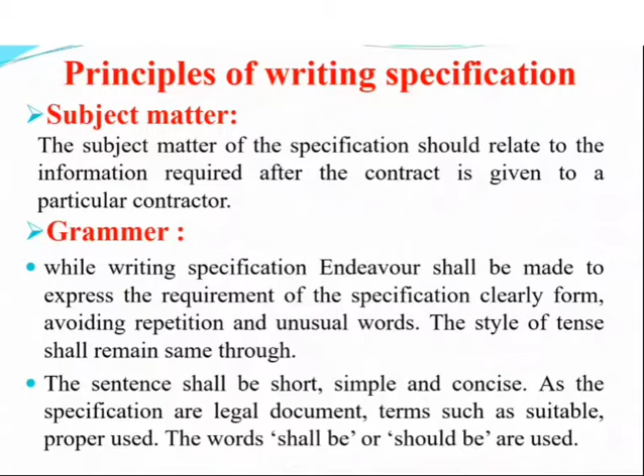Next, third is meaning. While drawing specification, only suitable words with desired meaning should be used. So words having more than one meaning shall be avoided.

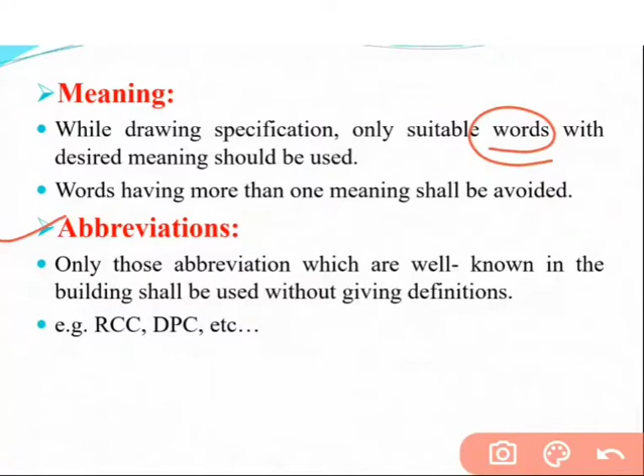Next, fourth is abbreviation. So only those abbreviations which are well known in the building industry shall be used without giving definition. The use of abbreviation facilitates easy understanding and reduces typing work without sacrificing clarity. For example, RCC, DPC, etc.

Now next is accuracy. Meaning the information given in the specification should be complete and correct. Otherwise, the contractor may claim for any extra cost due to damage occurred to him by the misleading information supplied by the owner. Also, care should be taken to see that information is not repeated in the specification.

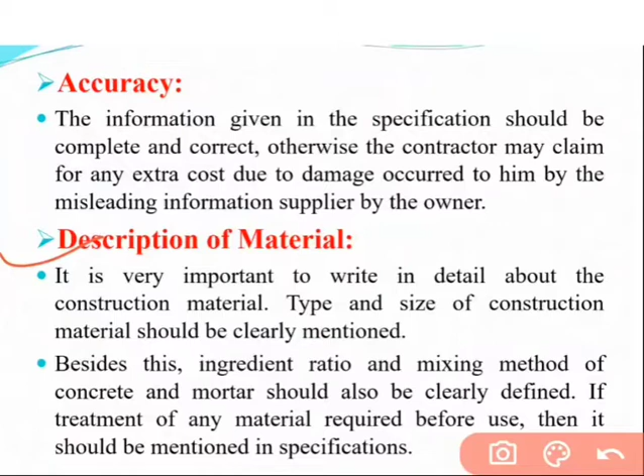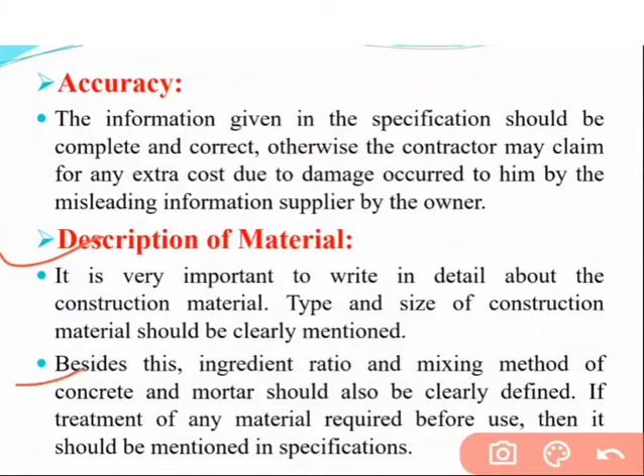Now next is description of material. It is very important to write in detail about the construction material. The quality and size of material required to do an item of work shall be fully described for checking up at site according to the clauses provided in the specification. And second, the proportion of mixing or treatment of materials, if required before use, shall be clearly described.

Now next is workmanship. Workmanship covers the method of mixing and proportion, the method of laying, preparation of base or surface, compaction, finishing and curing, etc. Procedure of every single item should be mentioned in detail.

Next is tools and plants. The different equipment, tools and plants required during construction should be clearly mentioned in specification. Arrangement of machinery before construction is only possible if it is mentioned in specification. The tools and plant to be engaged to carry out work shall be described. It should also be mentioned whether the contractor has to arrange on its own or the client will arrange equipment for the contractor.

Now next is clauses of a specification. Clauses of a specification should be written in ascending order in short follow the construction schedule. First thing comes first. As far as possible, the clauses shall be arranged in the order in which work shall be carried out. This doesn't mean to follow the works according to the order of clauses, but it facilitates references. For example, clauses related to excavation should come before foundation or footing related clauses.

Now next is practicability. That means the specification should be framed while keeping in view the practical limitation of materials and workmanship. Also, the specification should specify use of commercial size and pattern of material, since it becomes expensive to manufacture special sizes, and it also takes more time to prepare such sizes.

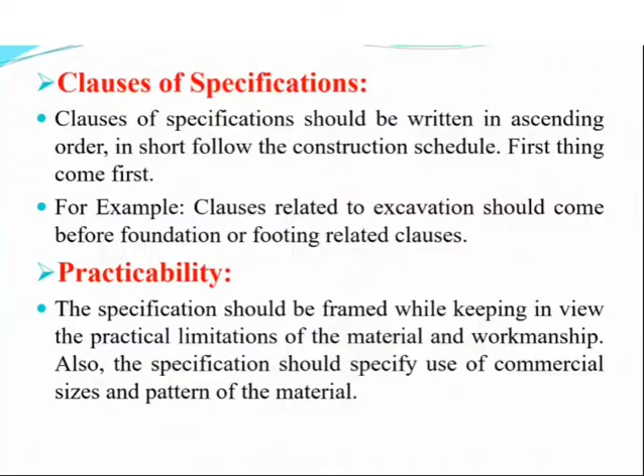Now next we are going to discuss detailed specification of various items. First is earthwork in excavation in foundation. First step is excavation. Before the earthwork is started, the whole area of construction is to be cleared of trees, grass, roots of trees, etc., completely removed and leveled horizontally to enable easy marking of center line of the building. The sides of trenches should be vertical and the bottom of the trenches should be leveled.

The excavation shall be done in accordance with the dimensions of trenches shown in working drawing, or such other as the engineer in charge may decide.

If the soil is not good and doesn't permit vertical sides, the sides should be sloped back or protected with timber shoring. The sides of trenches should be vertical and the bottom of trenches should be flat. In case of loose soil, the sides of trenches should be shored with steel sheet.

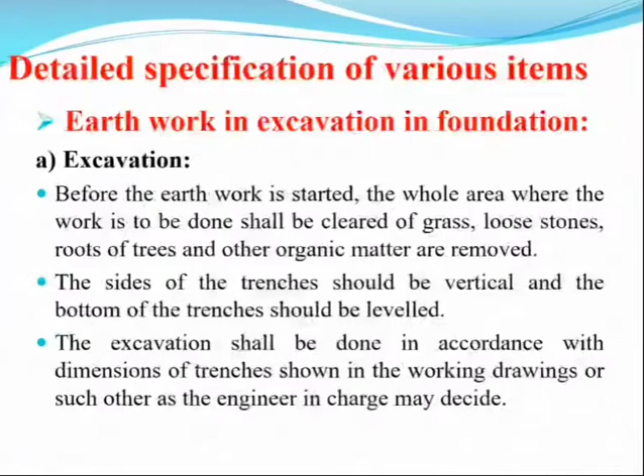Now the second step is fencing. Suitable temporary fencing is to be provided around the site of excavation to avoid any accidental fall into the trenches.

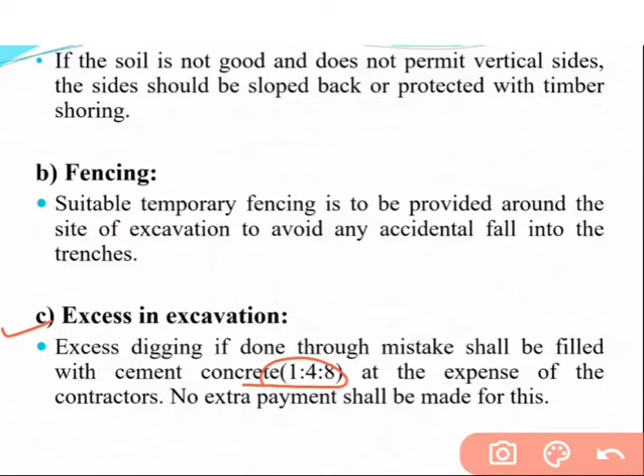Now the third step is excess excavation in foundation. Digging, if done through mistake, shall be filled with cement concrete 1:4:8 proportion at the expense of the contractor. So no extra payments shall be made for this.

Now the next step is water in foundation. If any accumulates in the trench, it should be pumped out, and no extra amount shall be paid. Necessary precaution shall be taken to prevent surface water from entering into the trench.

Now next, finds. The material or valuables found during excavation shall be the property of the government or owner.

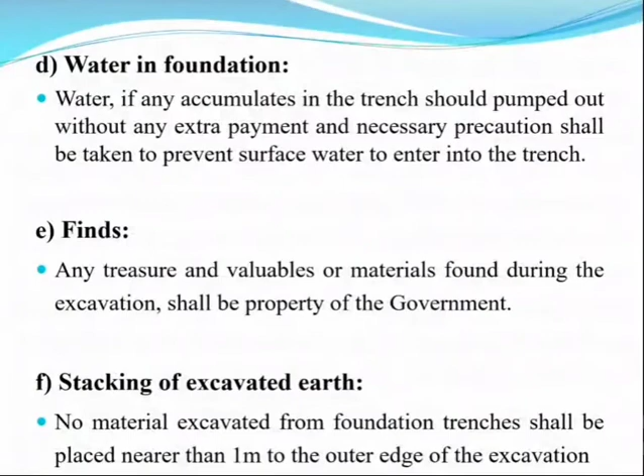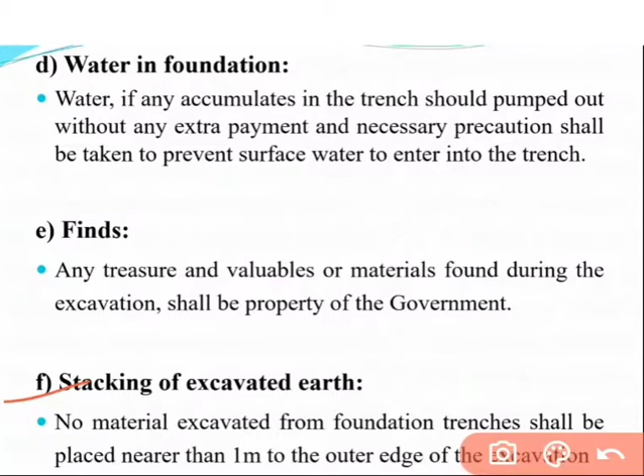Now next step is stacking of excavated earth. No material excavated from foundation trenches shall be placed nearer than 1 meter to the outer edge of the excavation.

After the concrete has been laid and masonry has been constructed, the remaining portion of the trench shall be filled up with earth free from rubbish and refuse materials in layers of 15 centimeters, watered and well rammed. The surplus excavated material shall be spread out uniformly up to a lead of 30 meters.

Next step is measurement and rate, and this is the last step of excavation in foundation. The measurement shall be taken in cubic meters, measuring length, width of concrete and depth of foundation from ground level, and the rate shall be for complete work for 30 meter lead and 1.5 meter lift, including all tools and plant required for completion of the work. For every extra lead of 30 meters and every extra lift of 1.5 meters, a separate extra rate is provided.

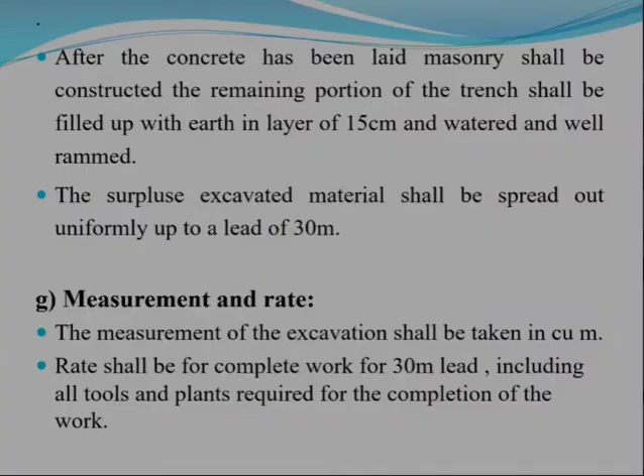Now next, detailed specification for cement concrete in foundation in 1:4:8 proportion. First step is proportion mixing. The proportion of materials shall be 1:4:8, where 1 part cement, 4 parts sand, and 8 parts aggregate by volume.

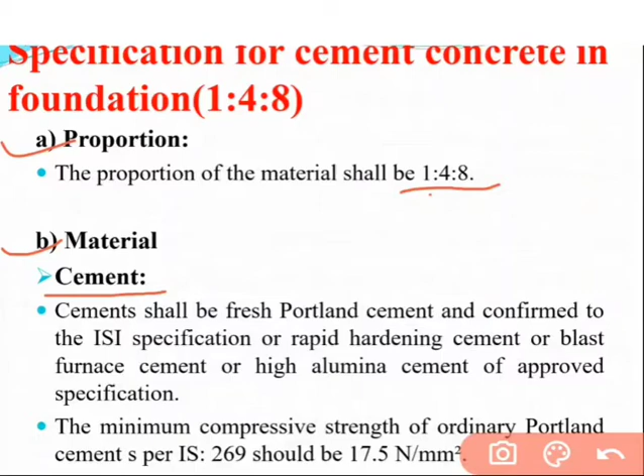Now second step is material. First material used is cement. Cement shall be fresh Portland cement conforming to ISI specification, or rapid hardening cement, or blast furnace cement, or high alumina cement of approved specification. The minimum compressive strength of ordinary Portland cement as per IS 269 should be 17.5 Newton per mm square.

Now second material used is fine aggregate. The fine aggregate shall conform to IS 383 up to date. It shall be clean, sharp, hard and angular grain and shall pass through 4.75 mm IS sieve. It should be free from dust, dirt, vegetable and organic matters. Sea sand shall not be used, so river or pit sand shall be used.

Now next material used is coarse aggregate. The coarse aggregate shall be hard broken stone or granite or similar stone. It shall be hard, strong, durable and dense. It should be free from soft, thin, flat, elongated, flaky particles. It should be clean and free from dust, vegetable and organic matter unless specially mentioned. The size of coarse aggregate shall be 20 to 40 graded down and retained in 5mm sieve.

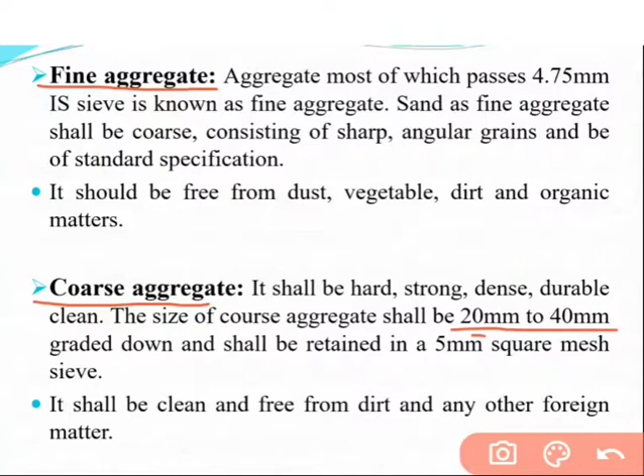Now next material is water. The water used shall be clean and reasonably free from injurious quantities of deleterious materials such as oil, acid, alkalis, salt and vegetable growth. Generally, potable water shall be used.

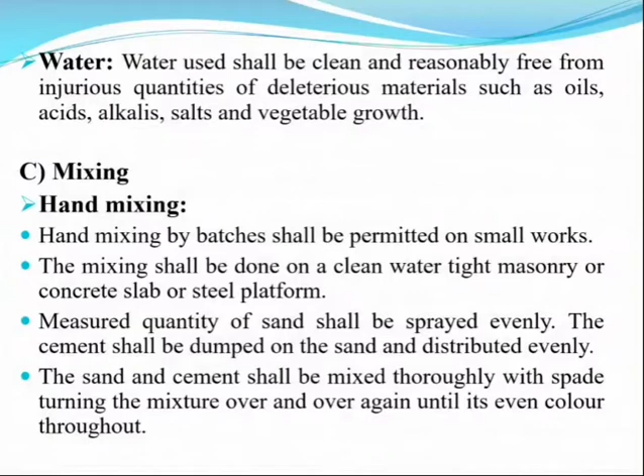Now third step is mixing. Mixing is basically of two types: first, hand mixing, and second, machine mixing. Hand mixing by batches shall be permitted on small works. Normally, all structural concrete shall be mixed in a mixer machine. Hand mixing shall be employed only in special cases with the specific prior permission of the engineer in charge.

The mixing shall be done on a clean watertight masonry platform, concrete slab, or steel platform. The measured quantity of sand shall be spread evenly on the platform. The cement shall be dumped on the sand and distributed evenly. The sand and cement shall be mixed thoroughly with a spade, turning the mixture over and over again until it is of even color throughout.

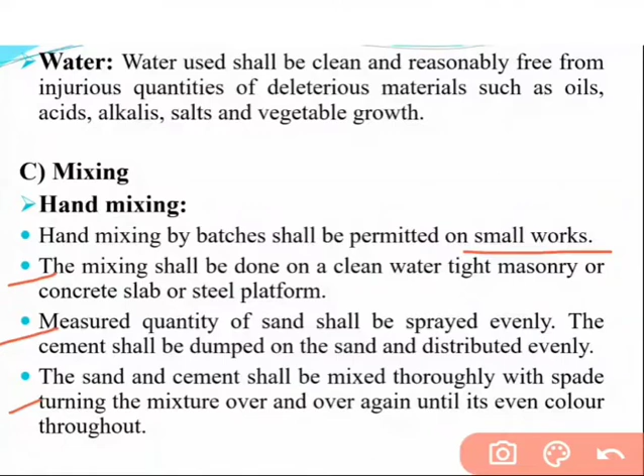Then the measured quantity of coarse aggregate shall be spread out and cement sand mixture shall be spread on its top. This shall be mixed at least 3 times by shovelling and turning over by twist from center to side.

Then 3/4 of the total quantity of water required shall be added while the material is turned in towards the center with spades.

Then the remaining quantity of water shall be added bit by bit using a rose head can, slowly turning the whole mixture over and over again until a uniform color and consistency is obtained throughout the pile.

And lastly, the measured quantity of coarse aggregate shall be spread out and the sand cement mixture shall be spread on its top. The mixing platform shall be washed at the end of the day.

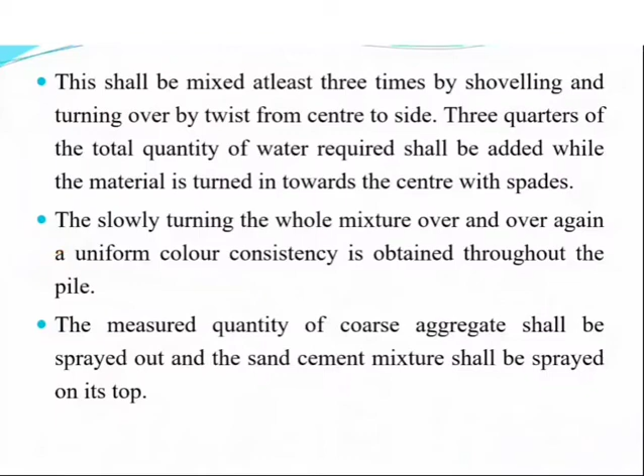Now second is machine mixing. The mixture drum shall be flushed clean with water.

Measured quantity of dry coarse aggregate shall be placed first in the drum. Then the measured quantity of sand and cement is added. Then the dry material shall be mixed in the mixing drum for at least 4 turns of the drum.

After which the measured quantity of water shall be added gradually and slowly with a water can while the drum is in motion, to give a plastic mix of required workability. The material shall be mixed in the drum for a period of not less than 2 minutes and until a uniform color and consistency are obtained.

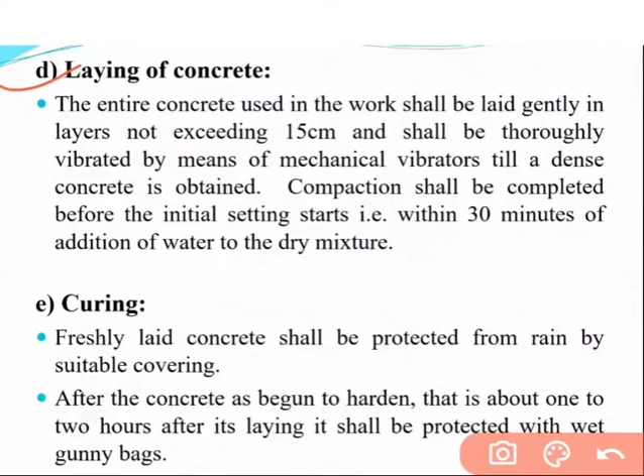Now the next step is laying of concrete. Concrete shall be laid in layers not exceeding 15 centimeters and compacted by pinning with a rod and tamping with a wooden tamper or with a mechanical vibrator until a dense concrete is obtained.

Then the compaction shall be completed before the initial setting starts, within 30 minutes of addition of water to the dry mixture. Over vibration, which will separate coarse aggregate from concrete, should be avoided. Now the next step is curing.

Freshly laid concrete shall be protected from rain by suitable covering. Then after the concrete has begun to harden, that is about 1 to 2 hours after its laying, it shall be covered with wet gunny bags.

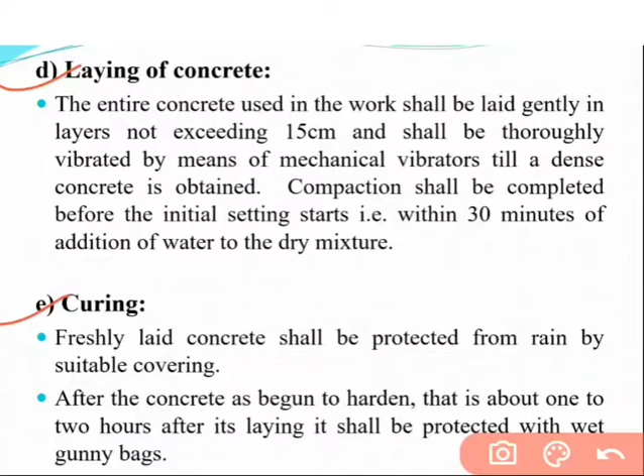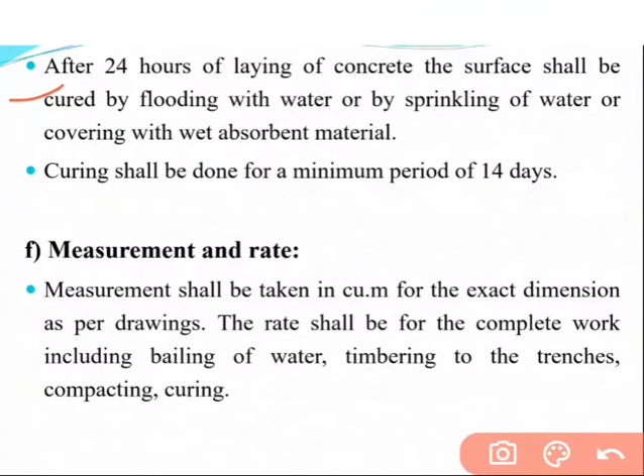After 24 hours of laying of concrete, the surface shall be cured by flooding with water, or by sprinkling water, or covering with wet absorbent material. Then the curing shall be done for a minimum period of 14 days.

Now the last step is measurement and rate. The measurement shall be taken in cubic meters for the exact dimension as per the drawing, and the rate shall be for the complete work including bailing of water, compaction, curing, timbering to the trenches, etc.

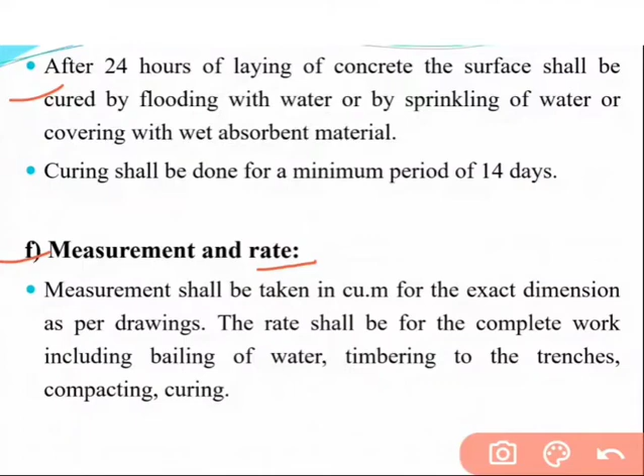Now next, let's discuss in detail the specification for reinforced cement concrete. First step is proportion. The proportion of the material shall be 1:1.5:3, where 1 part cement, 1.5 part sand and 3 part aggregate by volume.

Second step is material. First is cement. The cement shall be fresh Portland cement conforming to ISI specification, or high alumina cement or blast furnace cement or rapid hardening cement of approved specification shall be used.

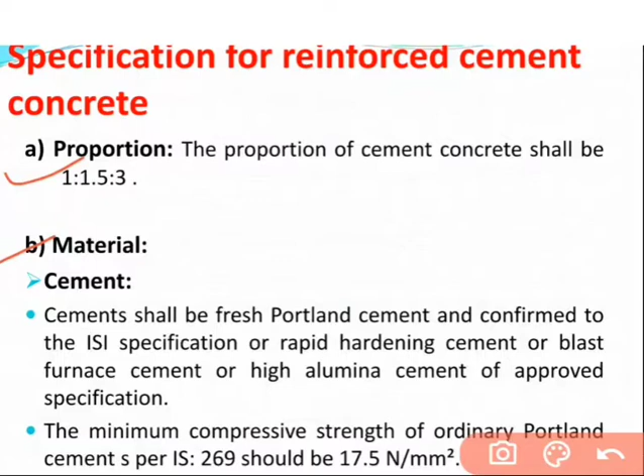Now next material is fine aggregate. The fine aggregate shall conform to IS 383 up to date. It shall be clean, hard and angular grained, and shall pass through 4.75 mm IS sieve, known as fine aggregate. It should be free from dust, vegetable and organic matter.

Now next material is coarse aggregate. The coarse aggregate shall be hard broken stone of granite or similar stone. It shall be hard, strong, durable and dense. It should be free from soft, thin, flat, elongated, flaky particles. The size of coarse aggregate shall be 20 mm graded down and shall be retained on a 5 mm square mesh sieve.

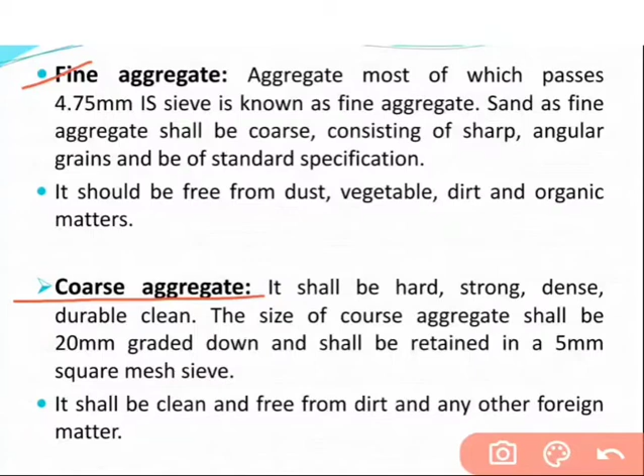Now next material is water. The water used shall be clean and reasonably free from injurious quantities of deleterious materials such as oil, acid, alkalis, salt, and vegetable growth. Generally, potable water shall be used.

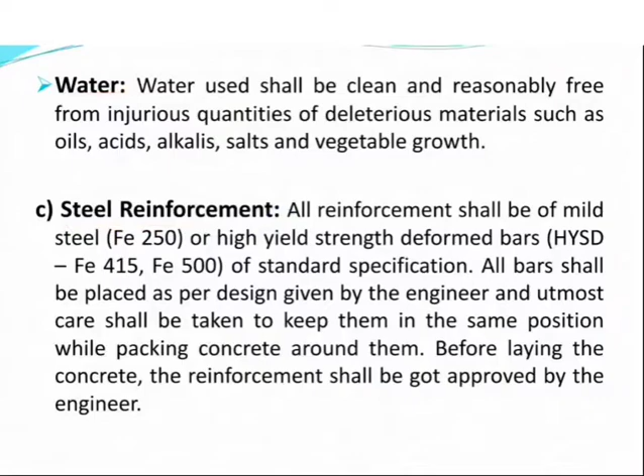Now next is steel reinforcement. Steel reinforcing bars shall be of mild steel or Fe250, or high yield strength deformed bar HYSD, Fe415, Fe500, of standard specification. It shall be free from corrosion, loose rust, oil, grease, paint, etc., which may destroy or reduce bond.

The steel bars shall be round and capable of being bent without fracture, and bars shall be hooked and bent accurately and placed in position as per design and drawing given by the engineer, and utmost care shall be taken to keep them in the same position while packing concrete around them.

Before laying the concrete, the reinforcements shall be got approved by the engineer. During laying and compacting of concrete, the reinforcing bars should not move from their position, and the bond should not be weakened.

Now next is centering and shuttering. The centering and shuttering shall be made of timber and tied with necessary wedges, sufficiently strong and stable not to yield under laying of concrete. The centering for the concrete work shall be sufficiently strong and rigid and in good condition so as to turn out a good smooth finish.

Also, the material for formwork shall be of timber or steel plate or plywood sheet or any other material approved by the engineer in charge.

A coat of oil washing or thin layer of paper shall be sprayed to have a smooth finished surface and to prevent adherence of concrete. For slab and beam, a camber should be given in centering at 1 cm per 2.5 meter, with a maximum of 4 cm.

Then the surface of the formwork shall be oiled before placing of concrete. Also, the centering and shuttering shall not be removed before 14 days in general. So 4 days for RCC column, 10 days for roof slab, and 14 days for beam. The centering and shuttering shall be removed slowly and carefully so that no part is disturbed or damaged.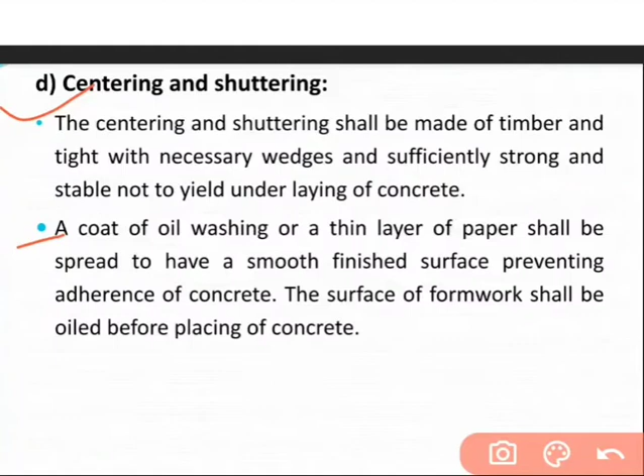Now next is mixing. The mixing process is already discussed in a similar topic of detailed specification for cement concrete in foundation. So first is hand mixing and second is machine mixing. Hand mixing by batches shall be permitted for small work. The mixing shall be done on a clean watertight masonry platform or a concrete slab or steel platform.

Then the measured quantity of sand shall be spread out evenly on the platform. Then the cement shall be dumped on sand and distributed evenly. The sand and cement shall be mixed thoroughly with a spade, turning the mixture over and over again until it is of even color throughout.

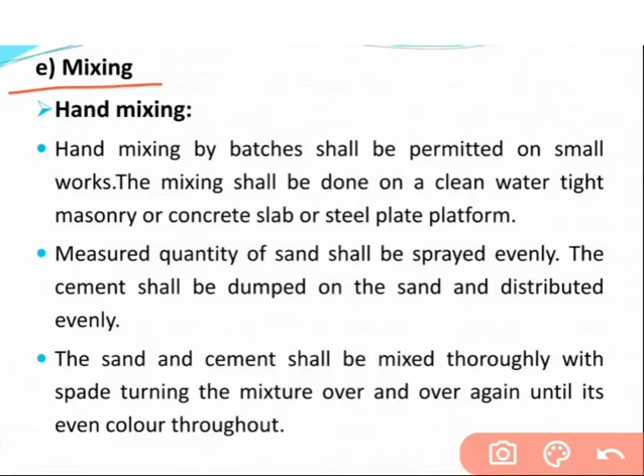Then the measured quantity of coarse aggregate shall be spread out and the cement and sand mixture shall be sprayed on its top. This shall be mixed at least 3 times by shovelling and turning over by twist from center to side. A hollow shall be made in the middle of the mixed pile.

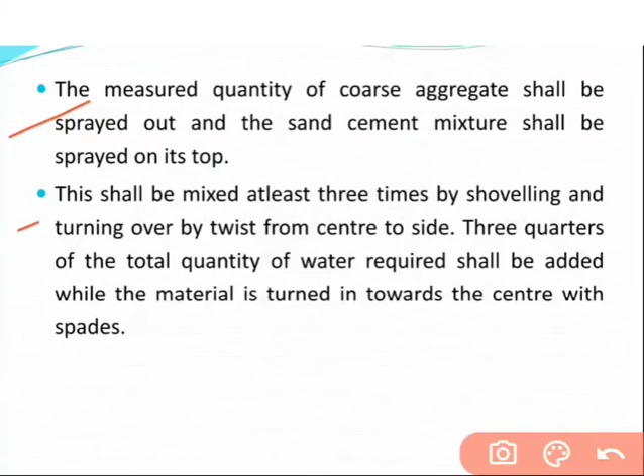Then 3/4 of the total quantity of water required shall be added while the material is turned in towards the center with a spade, and the remaining quantity of water shall be added by watering can with rose head, slowly turning the whole mixture over and over again until a uniform color and consistency is obtained. The mixing platform shall be washed at the end of the day.

Now the second process is machine mixing. The mixer drum shall be flushed clean with water. Measured quantity of dry coarse aggregate shall be placed first in the drum. Then the measured quantity of sand and cement is added to the drum.

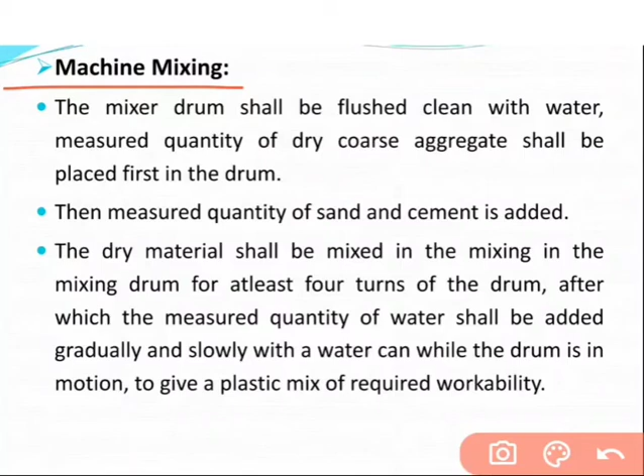Then the dry material shall be mixed in the mixer drum for at least 4 turns of the drum, after which the measured quantity of water shall be added gradually and slowly with a water can while the drum is in motion, to give a plastic mix of required workability. The material shall be mixed in the drum for a period of not less than 2 minutes and until a uniform color and consistency are obtained.

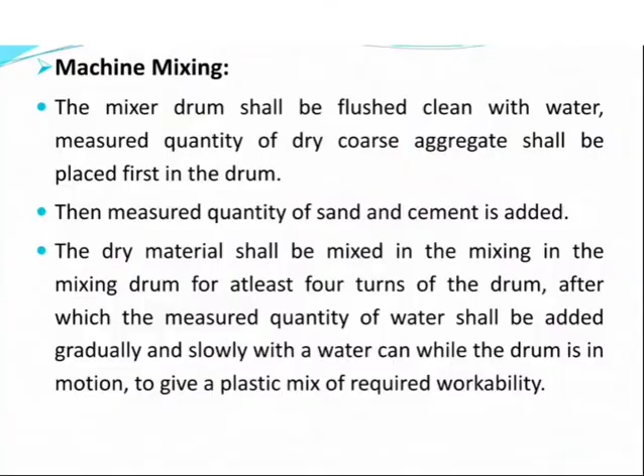Now next is the laying of concrete. The concrete shall be laid in layers not exceeding 15 centimeters and compacted by pinning with a rod and tamping with a wooden tamper or with a mechanical vibrator until a dense concrete is obtained.

So compaction shall be completed before the initial setting time starts, within 30 minutes of addition of water to the dry mixture. Over vibration, which will separate coarse aggregate from concrete, should be avoided.

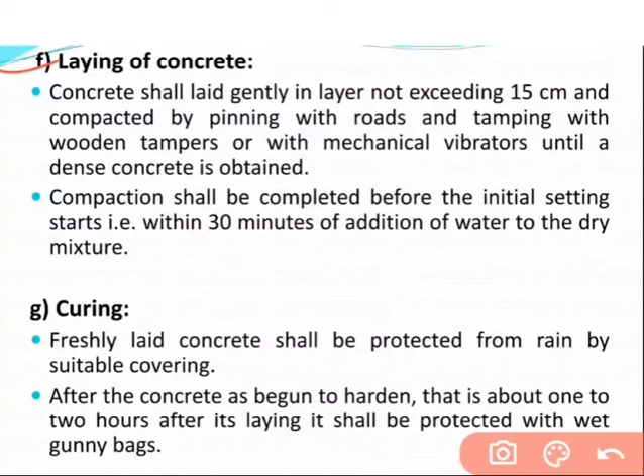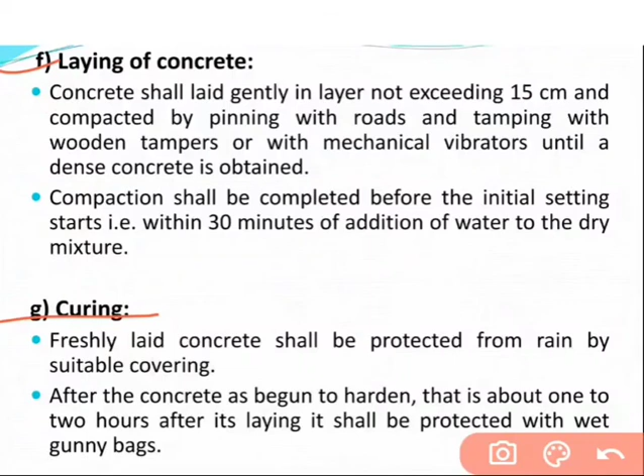Now next is curing. Freshly laid concrete shall be protected from rain by suitable covering. After the concrete has begun to harden, for about 1 to 2 hours after its laying, it shall be covered with wet gunny bags. Then after 24 hours of laying of concrete, the surface shall be cured by flooding with water or by sprinkling of water or covering with wet absorbent material. The curing shall be done for a minimum period of 14 days.

Now next is removal of formwork. The centering and shuttering shall be removed after 14 days of casting. It shall be removed slowly and carefully so that no part is disturbed.

And last is measurement and rate. The measurement shall be taken in cubic meter for exact dimension as per the drawing given by the engineer. The rate shall be for the complete work, including timbering, bailing out of water, compaction, curing, trenches, etc.

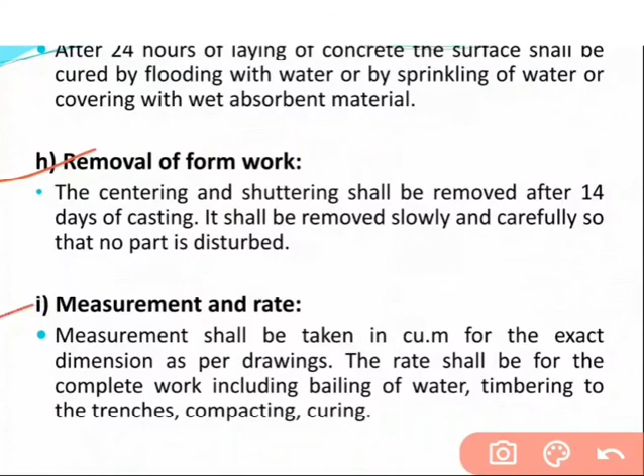Thank you. In today's video lecture, we have completed the detailed specification of earthwork in excavation in foundation, detailed specification for cement concrete in foundation, and detailed specification for reinforced cement concrete. In the next video lecture, we will cover the remaining topics of detailed specification for various items.